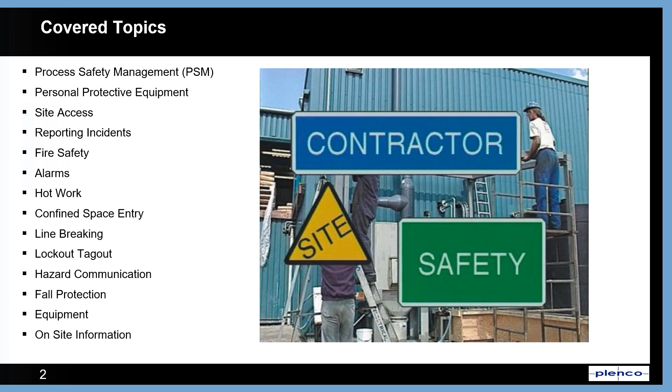Plastics Engineering Company is covered by the Process Safety Management, or PSM, OSHA standard. So what is process safety management? The rules were created in 1992 to increase safety at facilities containing certain hazardous chemicals or large quantities of flammable liquids. At Plenco, we fall under this regulation due to the quantity of formaldehyde on site as well as flammable liquids. Our PSM covered areas are formaldehyde unloading and storage, resin cooking, and phenol recovery.

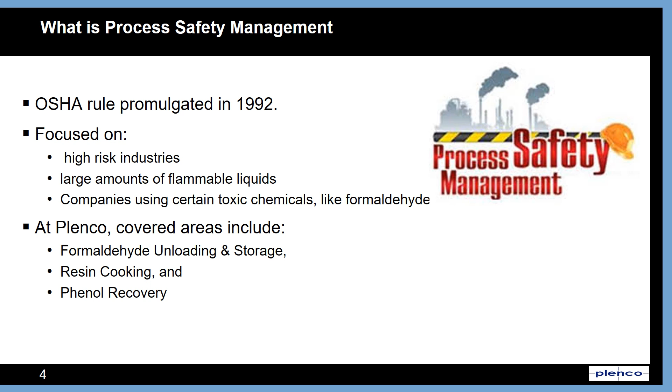Process safety management has 14 required components, plus an overview requirement. We will briefly cover each of these.

Employee participation is a critical component to the PSM program. Employees must be involved in their own safety, not just passive participants. There are many ways that employees participate in safety at Plenco, and we also expect you to participate by following safety guidelines and training, as well as following safe work practices.

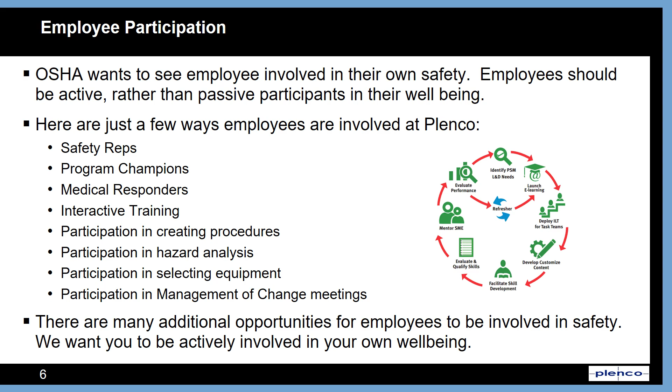The next section looks at something called Process Safety Information, abbreviated PSI. PSI is broadly broken into three areas: chemical, technology, and equipment. Chemical is pretty much just like it sounds. It deals with the health hazard information of covered chemicals. In our case, this is primarily provided through SDSs available from kiosks and from your project contact. Additional information is also available from the EHS department.

The technology section deals with process chemistry, process flow, maximum inventories, and safe operating limits. Much of this information is also included in specific operator instructions for making resin.

The equipment section deals with characteristics of process equipment. This includes materials of construction, process diagrams, electrical information, relief and safety systems, as well as design codes and equipment lists. Taken together, it provides detailed information on the safety systems and performance characteristics of the process. It enables staff to make good decisions about the process and possible dangers and how to avoid them.

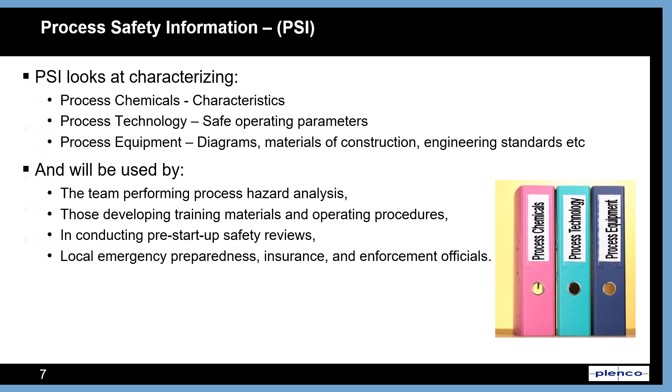Process hazard analysis is a tool used to critically examine a process and make possible improvements to safety or process performance. The analysis is conducted using a team of specialists, including operators, that evaluate the likelihood and severity of possible system failures. These evaluations must be revisited every 5 years or when there is a significant change to the process. In this way, they remain current with small changes that may occur.

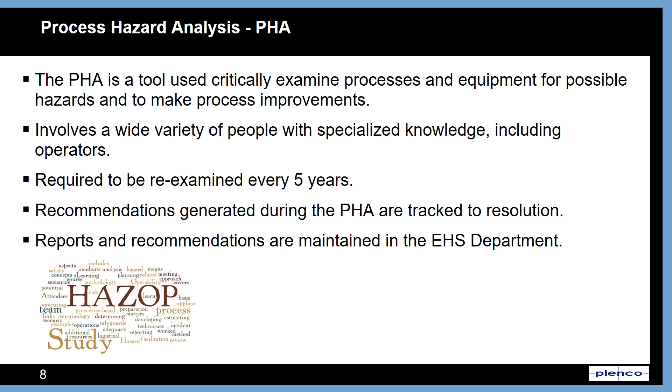Recommendations generated through this process are evaluated and tracked to a final resolution. Not every recommendation will result in action, but they are all examined.

Operating procedures cover specific instructions generated to safely operate covered processes. They can be very specific, like the instructions for making a specific resin, or more general in nature, like hose inspection procedures. Each of these must be reviewed annually to determine if changes or updates are necessary. In this way, they remain relevant to the process.

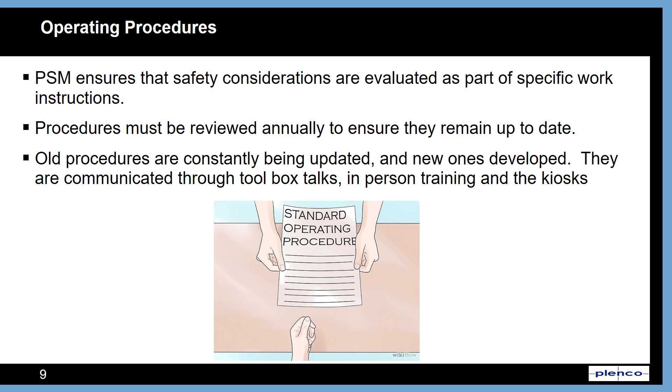Training is a critical component of the PSM program. Initial training is required on a broad range of topics. As a contractor, your employer has to indicate that they are complying with OSHA training requirements across a range of topics, including lockout, confined space entry, and hot work.

If there are specific hazards you will encounter as part of your job at Plenco, you will receive additional training both in this course and on site. It is important that if you have questions about training materials that you ask. Communication has to occur in both directions. For online courses, you should come to EHS with any questions or concerns after training.

PSM isn't just about Plenco employees, it also covers contractors doing work in PSM covered areas. We want to ensure that we are bringing in contractors that are safe and responsible, so they must send us information on their safety programs and performance before being hired. This includes information on their accident rates.

We need to inform them of hazards they may encounter while working here. We do this through the use of contractor orientation packets as well as this training. Additionally, we provide contractors with feedback on their on-site job performance.

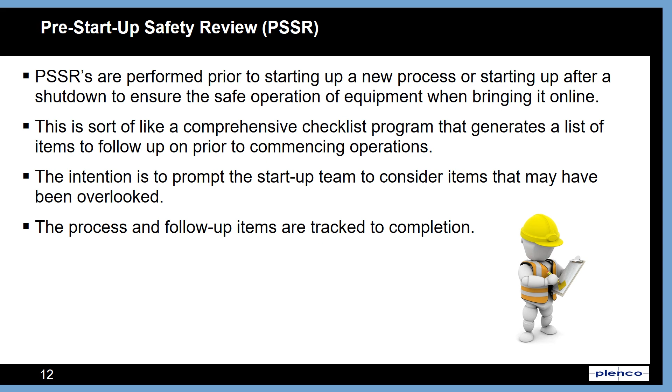Pre-startup safety reviews help us to safely start a new process or restart processes that have been modified. The process of going through the checklist generates follow-up items to be completed prior to or immediately following startup. The intention is to use the group to discover items that may have been overlooked during project completion. Items generated through the PSSR process are tracked to completion and documentation is retained.

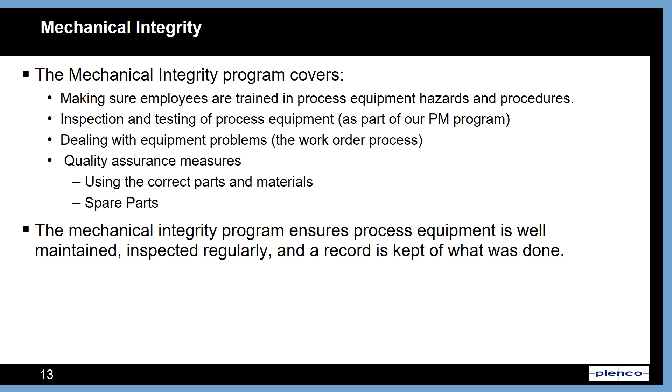Mechanical integrity program focuses on making sure equipment is properly designed and maintained and that employees are properly trained in the process hazards and procedures. You may note some overlap in these sections. This is intentional and intended to make sure that some important aspects of safety are not overlooked. This section also covers how we complete and record work orders, preventative maintenance, and record keeping. In some cases, it even covers what we keep available for spare parts. As a whole, the program ensures that equipment is well maintained, inspected regularly, and that a record of what was done is maintained.

While hot work is its own OSHA program, it is also specifically called out in PSM. Because of the potential danger from ignition sources, a complete hot work program is an important component of our overall safety program, specifically in complying with the PSM standard. In addition to following the minimum guidelines for hot work established by OSHA, Plenco follows the more exhaustive procedures set forth by FM Global, our property insurer. This measure helps to ensure the safety of both the facility and the personnel working here. Individuals with responsibility under the hot work program must receive training on their responsibilities and how to safely complete them.

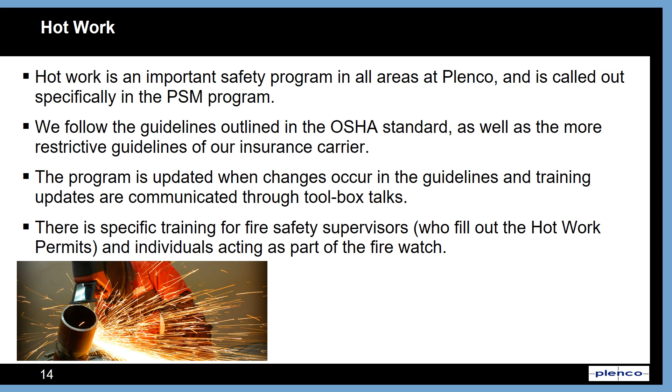Management of change, often referred to as MOC, is a process used to evaluate changes made to covered processes and the possible hazards those changes may pose. Even small changes in material types can have significant consequences. This process gets all of the involved parties in one room to discuss what the possible outcomes of the change might be, as well as identifying actions that may need to be completed prior to the change and immediately following.

Depending on the complexity of the change, it could also trigger a process hazard analysis or pre-startup safety review. In less complex instances, it may only trigger modifications to operating instructions or process documentation. The outcomes from a change can impact many areas we have discussed, so it is important that all aspects are identified and followed through on.

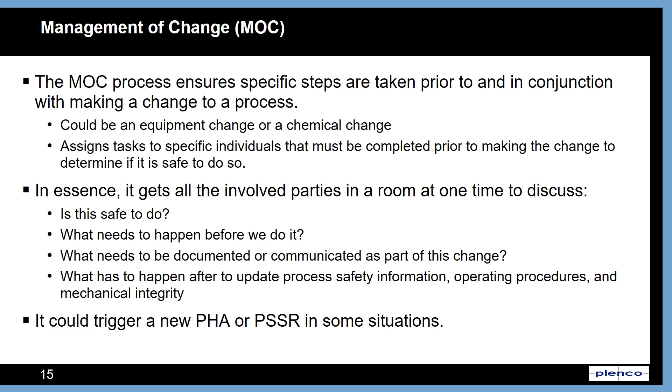Incidents at chemical plants can have serious ramifications. When an incident occurs, it is important that the cause is fully understood and corrective actions are taken to prevent reoccurrence. The PSM standard has specific requirements for incidents that occur at chemical facilities in terms of how fast they are completed and when they begin. We have additional requirements we will discuss later in this program that relate to contractors that have incidents and how your investigation program needs to overlap with ours.

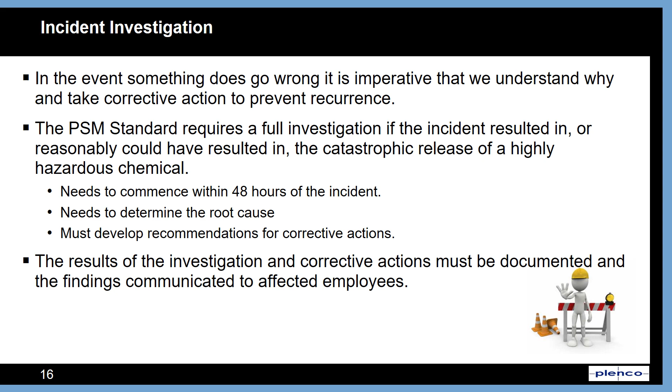Emergency planning and response is at the heart of the PSM program. It ensures that we prepare for both simple emergencies and complex situations that may arise. At Plenco, we have an integrated contingency plan that outlines our response to common safety and environmental emergencies. We also have special directions for shutting down critical processes in the event of an emergency to keep everyone safe.

The type of training you will receive depends on a person's responsibilities. For most people, the primary responsibility in an emergency will be to evacuate the facility or seek shelter in a designated storm shelter. If you are directed to evacuate, it is important that you do so immediately and proceed to the guard shack where you will be accounted for.

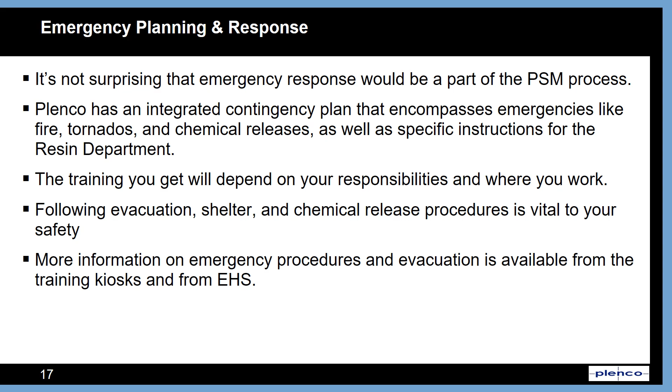Compliance audits act as a quality check on the functioning of the PSM program. We have an annual list of items that we need to complete, which acts as an annual internal audit. We also conduct audits from outside the program on a 3-year basis that acts as a more thorough investigation of the program and makes sure that all required components are in place.

The final section deals with trade secrets. The program recognizes that some information may need to remain proprietary. When proprietary information is involved, it may be protected through non-disclosure agreements and document control.

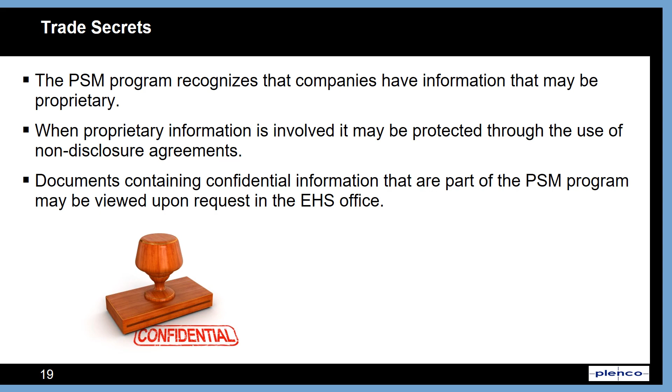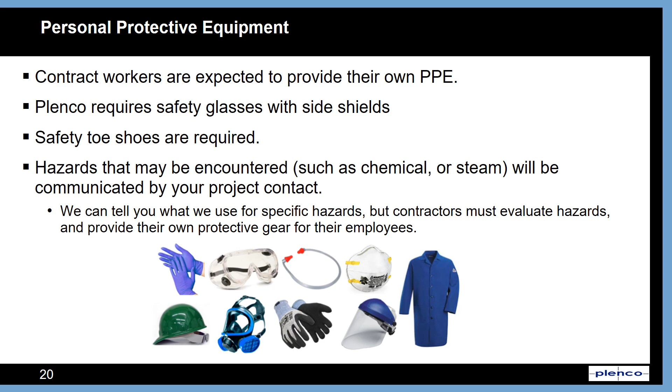All workers at Plenco are required to wear safety glasses with side shields as well as safety shoes at a minimum. Most jobs will require additional PPE. Your project contact will make you aware of the hazards and may share with you kinds of PPE we use, but contractors are required to furnish their own PPE and safety equipment.

Plenco has a security fence around the perimeter of the property. Contractors are only permitted to enter and exit through the manned security gate, Gate 1, located on North Ave. Each contract employee must check in with the security guard and personally sign in and out of the visitor log.

While on site, contractors are restricted to their designated job areas. This is for your safety. Smoking is only allowed in designated areas. Your contact person will make you aware of where these are.

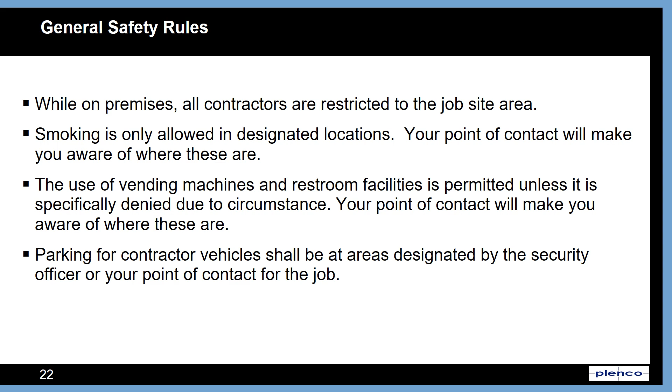The use of vending machines and restroom facilities is permitted unless you are specifically directed otherwise. Your contact person will advise you of what facilities to use and where they are. If facilities will not be available, the contact person will make you aware of that in advance so other arrangements can be made. Parking locations for contractor vehicles will be indicated by the security officer or your point of contact at the facility. Please adhere to the instructions you are provided as they are for your own safety.

In the event a contractor has an accident or incident, it must be reported immediately. Basic medical attention, first aid, is available from Plenco medical responders. If additional treatment is needed, outside assistance will be called. To get basic medical attention, ask your project manager or a Plenco employee to help provide assistance.

We are required to maintain a log of contractor accidents as part of the PSM program. Contractors are expected to complete an accident report if an employee is injured and to provide a copy of the report to Plenco for review. Plenco may also conduct its own investigation if necessary.

If you need to summon emergency services, you can dial 9-911 or simply 911 from any company phone and it will go through. Be sure to provide responders with information about your location, such as the building number. Again, Plenco employees can provide assistance if necessary in directing first responders to your location.

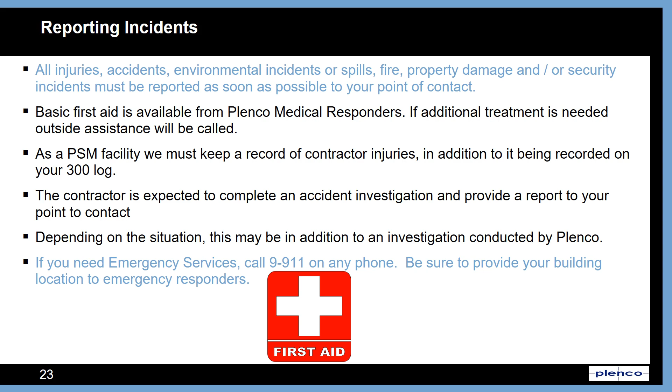There are many flammable or combustible materials at Plenco, and as a result, fire protection systems are important. We have automatic sprinkler systems located throughout the plant. These are heat activated, and activation will automatically notify the Sheboygan Fire Department. We also have pull station alarms that can be activated manually. Activating a pull station also results in notification of the Sheboygan Fire Department. Pull stations are located near all stairwells and exits.

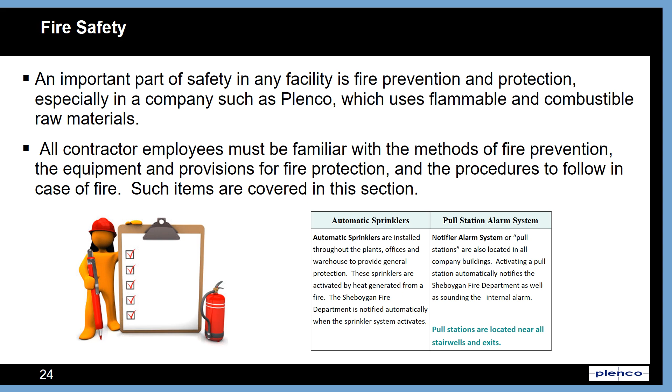In the event of an evacuation emergency, you should quickly leave the building and assemble near the guard shack where you signed in. In this way, you will be accounted for. If you do not assemble there, you will be designated as missing, and this will be communicated to the fire department. In the event of a shelter emergency, you should proceed to one of the marked shelter locations until the threat has passed. Alarm sounds are indicated in the table, and your contact will make sure you're aware of what they are during your on-site orientation.

I will also play at this time the sound of the alarms for you. This is the fire alarm. And this is the take shelter alarm.

In either situation, you'll receive additional information from your contact on when it is safe to return to work.

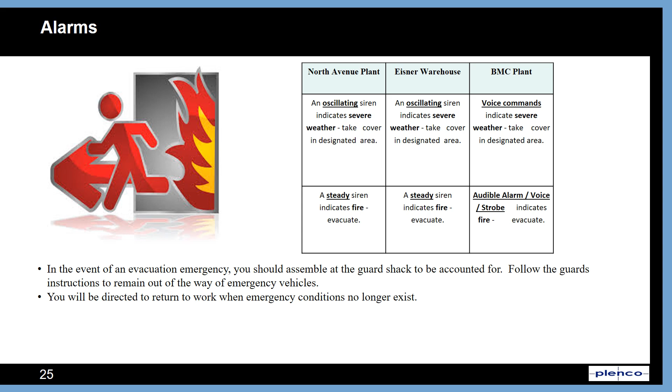Fire extinguishers are located throughout the facilities, and where special types of fire extinguishers are required, they have been deployed. These would include CO2 and water fire extinguishers, in addition to the ABC fire extinguishers. One consideration here is that the extinguishing agent in ABC fire extinguishers are a contaminant for our product, and the dust can be difficult to distinguish from our material.

If you do discharge an ABC fire extinguisher on company grounds, it is very important that you notify your contact immediately. There are specific internal measures that must be taken to prevent the spread of the contamination to the extent possible. One thing you can do to help is to limit the area exposed as much as possible and prevent people and vehicles from entering and exiting the area until a cleanup crew arrives.

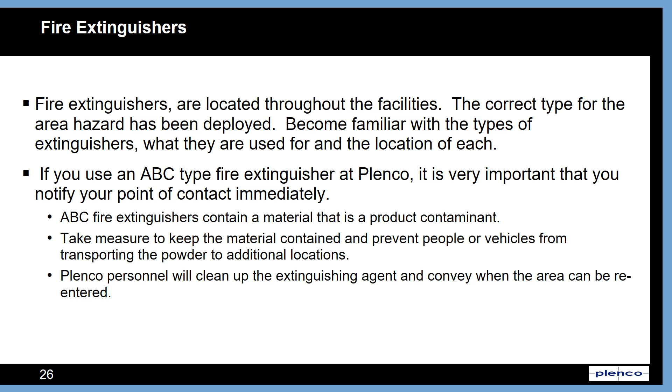Like any company that has flammable or combustible materials, good housekeeping is important. Keeping your work area clean and free of dust will aid our efforts. Keep flammable liquids in approved containers and never use them around sparks or flame. Dispose of scraps, rags, and other contaminated materials in approved containers. Observe the smoking restrictions. Smoking is allowed only in designated locations. Keep aisles, doors, and fire equipment clear at all times.

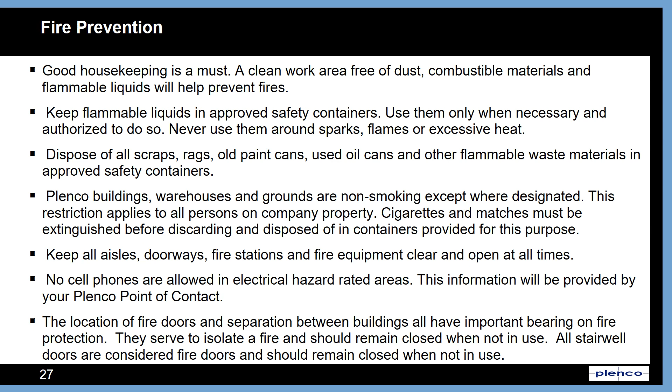Cell phones are not allowed in electrically hazard rated areas. This information will be provided to you by your Plenco point of contact. The location of fire doors and separation between buildings is part of our fire control system. All stairwell doors are considered fire doors and must remain closed when not in use.

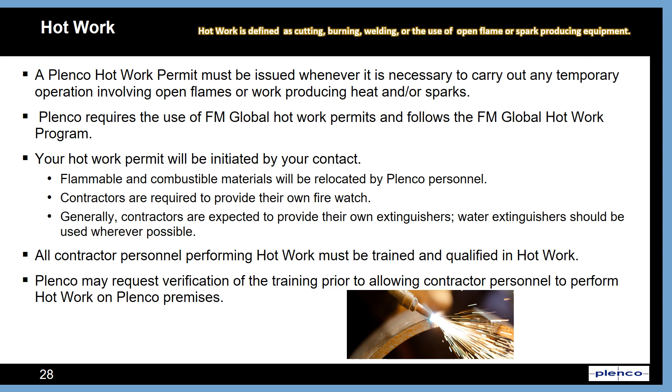Plenco's Hot Work program follows the FM Global program, and we use permits provided by them. If you need a Hot Work permit, it will be initiated by your Plenco contact. Contractors are expected to provide their own fire watch and also expected to provide their own extinguishers. Whenever possible, water fire extinguishers should be used to mitigate the contamination threat of ABC fire extinguishers. All contractors performing hot work must be trained in the Hot Work program requirements. Plenco may request verification of training before work begins.

A permit must be issued prior to entry of any permit-required confined spaces. Prior to entry, contractor employees must be trained in confined space entry.

Plenco will identify the spaces, provide information on known hazards associated with the space, and aid in establishing the initial permit. The contractor will coordinate with the contact to complete the permit, ensure all conditions have been met for safe entry, provide all necessary equipment to safely enter and monitor the space, and return the completed permit when finished. Contractor employees must provide their own rescue services and equipment.

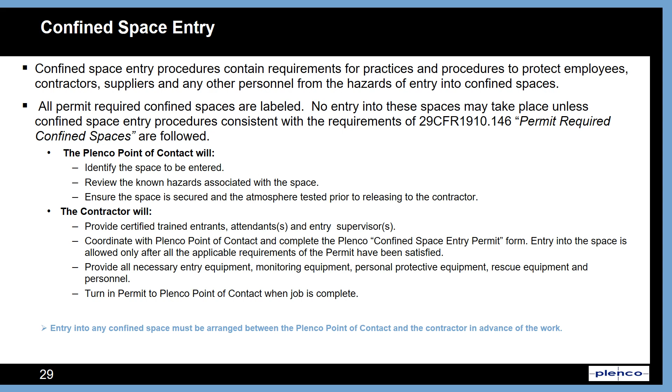Line breaks, when necessary, will only be performed by Plenco personnel. There are many lines at Plenco that contain hazardous materials, and it is for this reason that only Plenco personnel will open them. If a line needs to be opened as part of a job, the contractor should work with his Plenco point of contact to have a permit issued and the line opened.

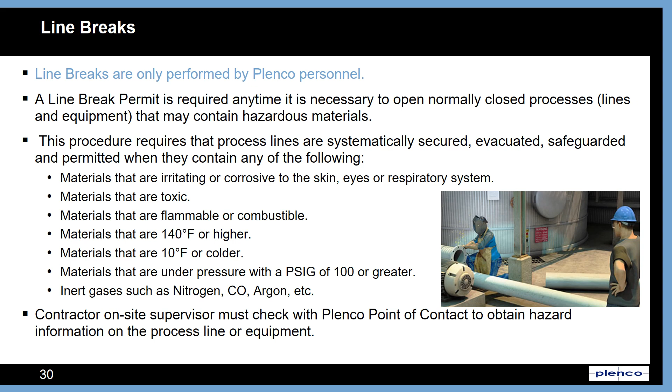Contractors need to coordinate their lockout-tagout program with the Plenco program. The Plenco program has an additional requirement that a supervision lock must accompany the contractor lock to ensure equipment is properly locked out and operations is aware of what is occurring.

The Plenco point of contact will fulfill his role by putting his lock on the group lockbox. It is also the responsibility of the point of contact to ensure that any necessary stop tags are issued and documentation is created for operations on what has been done.

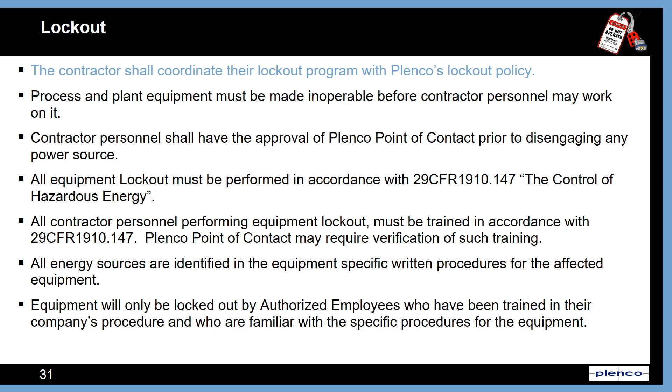Contractors are responsible for providing their own locks. Contract employees must be trained in lockout and authorized by their employer. Plenco will make our lockout procedure available and will apply locks to de-energize equipment as part of the supervision lock process. Contractors should not disengage any power source without prior approval and the participation of Plenco supervision.

Contractors must make their point of contact aware of any materials or chemicals that they are bringing on site and have SDSs available for them. As part of Plenco's hazard communication program, contractors must be made aware of the chemical hazards present in materials here as well.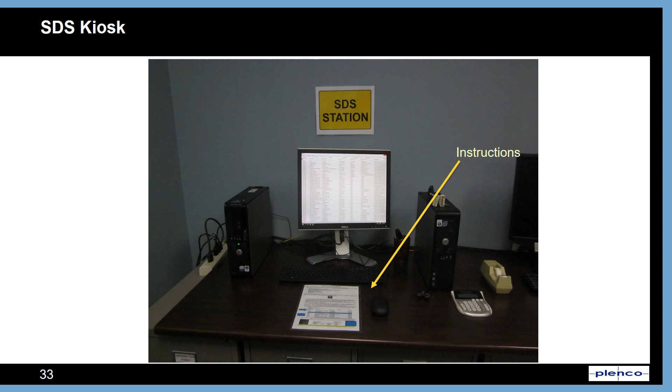SDSs are available from your Plenco contact or from any employee if needed. SDSs are maintained electronically and are available from any computer and from designated kiosks throughout the plant. If you need one, just ask and it can be immediately provided.

All containers with material in them must be labeled in compliance with the Hazard Communication Standard. If you are bringing materials in, make sure it has a legible primary container label, and if it is a secondary container, that it contains the name of the material, hazardous components, and any applicable hazard warnings.

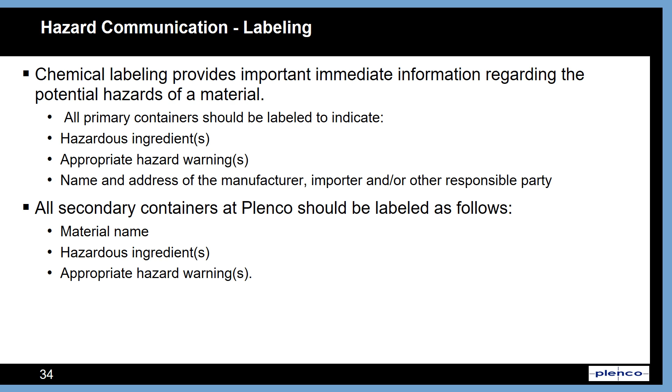Plenco uses a lot of different chemicals in its operation. However, contact with hazardous materials is not typical. Even so, the hazardous nature of these materials requires that you know how to protect yourself if you were to come into contact. The chemicals of greatest concern are in the resin department, as well as the storage tanks out in the tank farm. Consequently, you will find many safety showers located throughout the plant as well as outside.

If you come into contact with a chemical or unknown liquid, it is important that you quickly use the safety shower to flush the chemical from your body. Contaminated clothing must be removed. If this is necessary, there are Tyvek suits in the kits located adjacent to each shower, along with materials to help decontaminate yourself. There is also a container marked phenol soap.

This will help to remove phenol from your skin more rapidly than water alone. If you are contaminated after showering, you will also need to seek medical attention. Our first responders can assist with the proper measures to take.

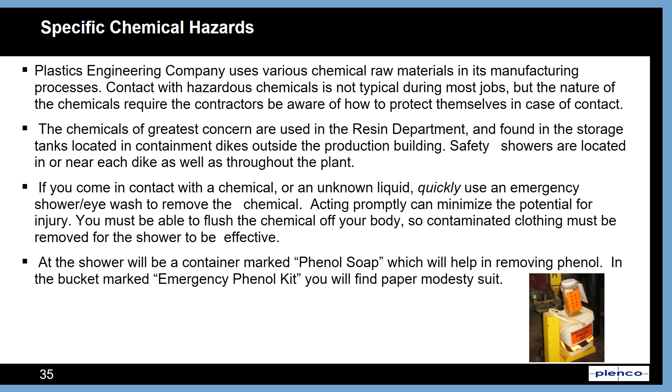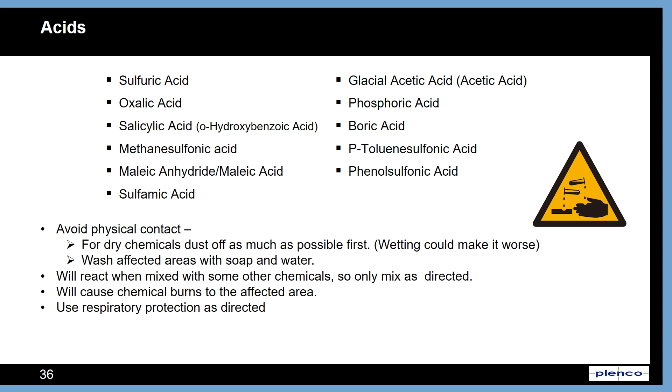We have a number of different acids here, some wet, others dry. If you get a dry acid on yourself, brush as much powder off as you can before wet washing. We also have wet and dry bases. As with the acids, brush any dry material off prior to washing. In either case, wash the contaminated area thoroughly with soap and water. If it is on your clothing, you will need to remove it and the skin underneath washed and rinsed.

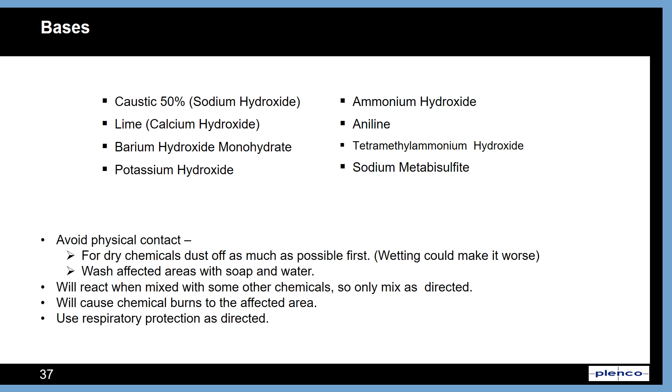Formaldehyde is one of our primary chemicals of concern. It is perceptible at very low levels, but this should not be used as an indicator for compliance purposes. In most instances, formaldehyde levels at Plenco are very low. However, in the event of a line break, higher levels could be encountered and respiratory protection should be used. Any release of formaldehyde should be reported to Peter Madden in the EHS department immediately.

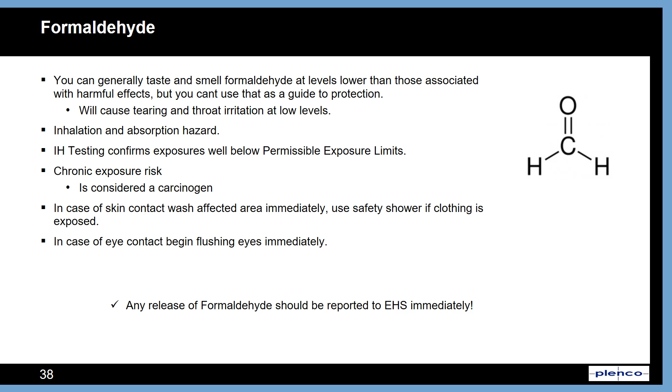In the case of exposure, use a safety shower or eye wash as appropriate and flush for 15 minutes. Additional medical attention may be necessary.

Phenol also has a distinct smell and is perceptible at very low levels. As with formaldehyde, phenol exposures are well below permissible exposure limits during normal operations.

In the event of contact, it is very important to wash the affected area with phenol soap immediately. Wash the area for 15 minutes and have someone call for emergency assistance. Direct contact requires medical follow-up, but measures need to be taken not to contaminate responders or their vehicles. Plenco personnel will work with you on this.

Aniline is in the phenol family and is potentially even more dangerous. The response for aniline exposure is the same as for phenol. It is extremely important that you begin washing the affected area immediately and then seek medical attention. Aniline binds to hemoglobin, kind of like carbon monoxide, and prevents the transport of oxygen to cells. There is an antidote and medical measures that can be taken, but the speed of the response is important.

If you suspect you have gotten aniline on you, you need to alert someone to call for help and start washing right away with the phenol soap.

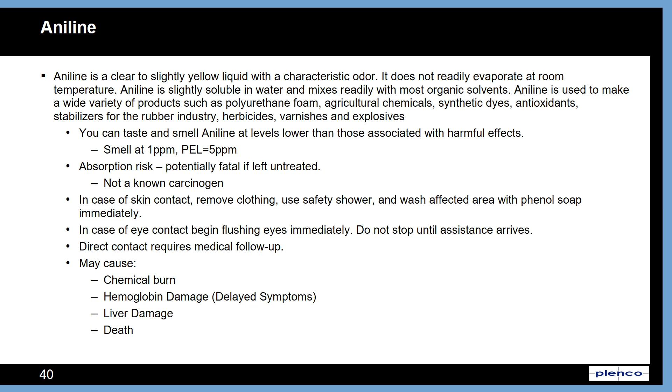Methanol is present in resin, phenol recovery, and the tank farm. Methanol is a highly flammable liquid and absorbs readily through skin. It is also an inhalation hazard. If you come into contact with it, wash the affected area thoroughly with soap and water.

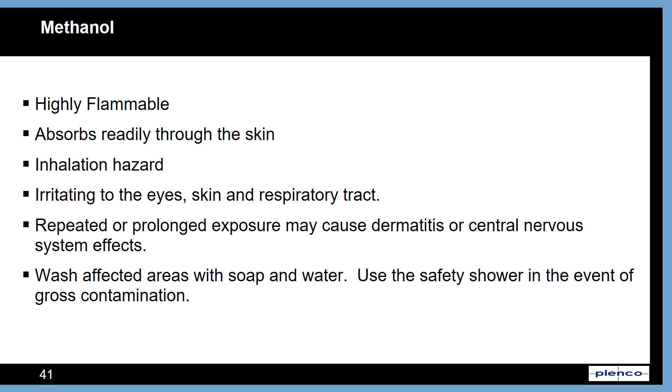Butyl acetate is used only at phenol recovery. It is also highly flammable and an absorption and inhalation hazard. As with methanol, the affected area should be washed with soap and water.

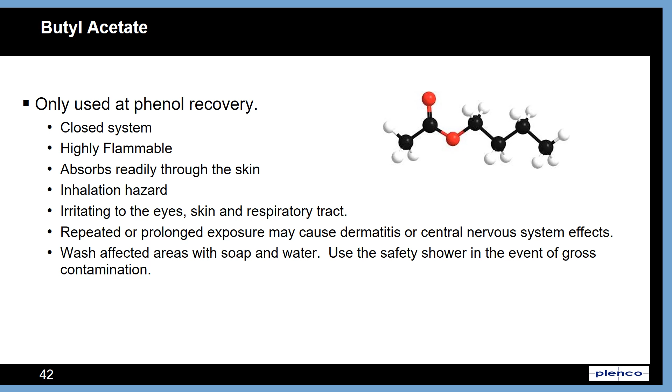There are a large number of dry additives that we put into mixtures. If you will be encountering these, you will receive specific instructions on PPE requirements. Do not commingle these materials. Even though they are dry, some are capable of reacting with others. If you encounter materials you are unsure about, ask for additional information on safe handling.

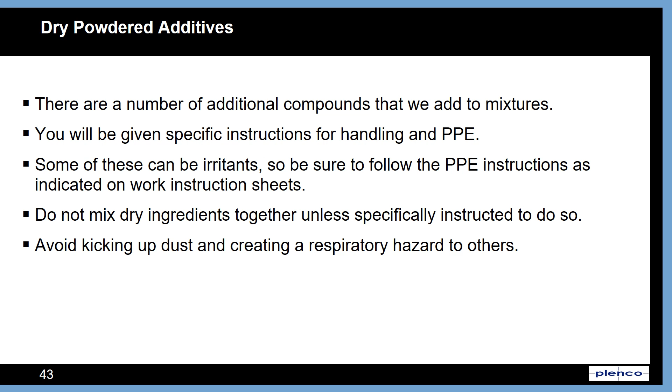The primary chemicals of concern at BMC are styrene. You will notice the smell, but it is well under exposure limits. Acetone, you'll also notice the smell of this material, and it's very flammable. Be sure to take appropriate precautions around this material.

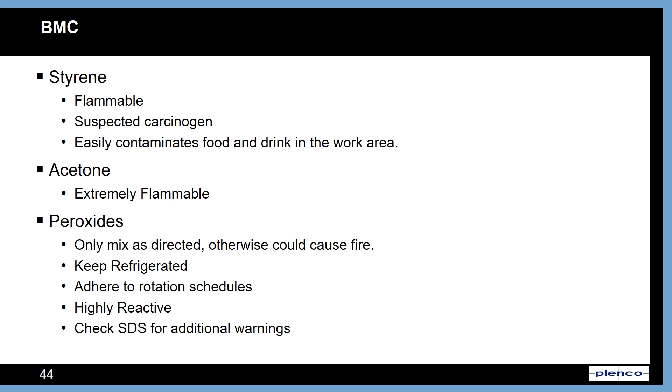There are also peroxides out there. The peroxides are stored in refrigerated areas and should not be encountered in the work you would be doing. If you would be working around them, you'll be provided additional information by your facility contact.

Distillate is generated during the resin making process and sent to phenol recovery for separation. It may contain phenol and formaldehyde. In the event of exposure, immediately remove contaminated clothing and wash the affected areas with phenol soap. Your Plenco contact will provide further instructions.

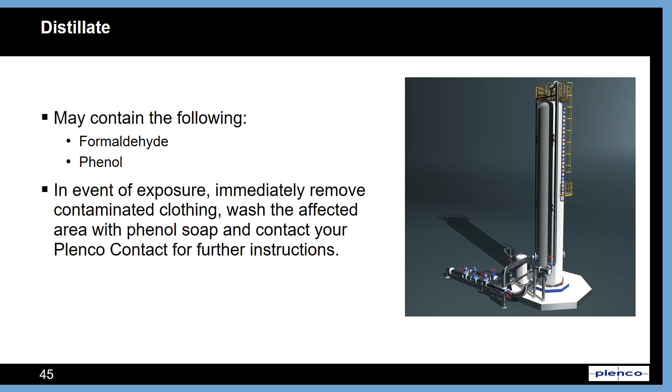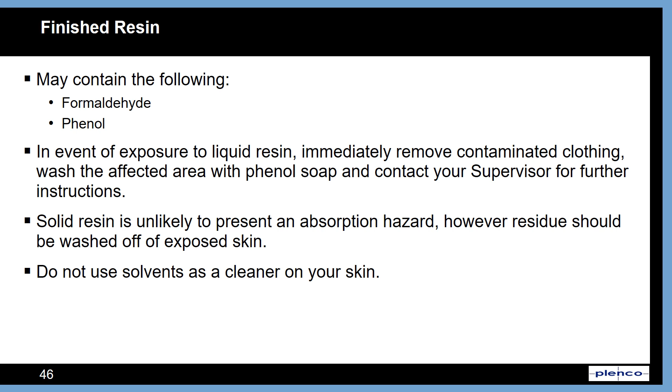We have dusts here as both raw materials and as product. Many of these are combustible, and some are even flammable. It is important to avoid creating situations where there is a dust cloud suspended in air. If you encounter a situation where dust may create a hazard, contact your project coordinator before proceeding further.

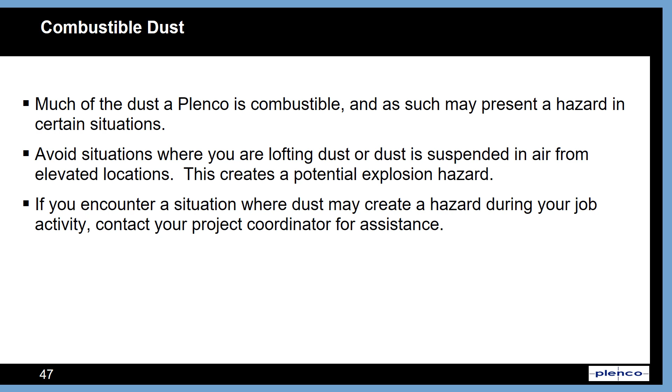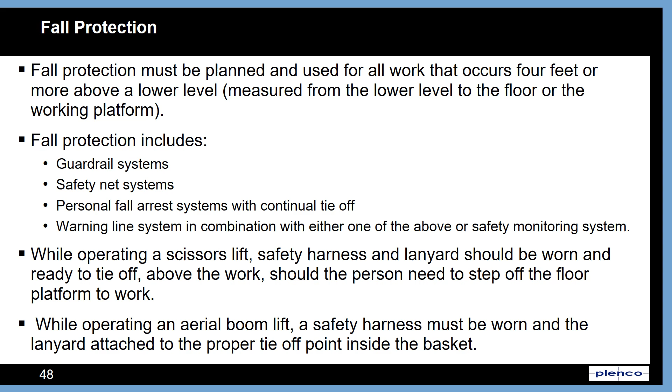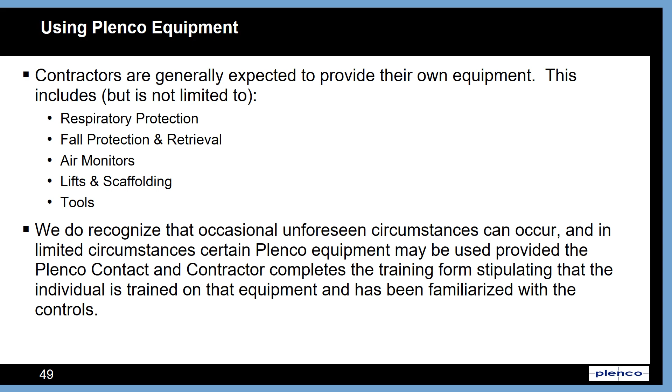Contractors are generally expected to provide all of their own tools and equipment. This includes safety equipment, PPE, as well as lifts. In rare instances, Plenco may permit its equipment to be used in an unforeseen circumstance. If that is the case, the contractor will need to indicate that they have received training in the use of the equipment in accordance with OSHA requirements. This will be handled by the Plenco project manager.

When you arrive, the project manager, your Plenco contact, will meet you and go over the specifics of the job. Additionally, on an annual basis, each contractor will be provided a hard copy of this training and will need to sign a form stipulating that they have received it.

You have heard it a lot during this training. If you have questions, ask someone. This is not the kind of environment you want to do things on a best guess basis in. Your contact will do their best to answer your questions right away, but if necessary, additional personnel will be pulled in to provide the information you need to do the job safely.

Thank you for your attention during this training. We hope to make your time at Plenco both safe and productive.